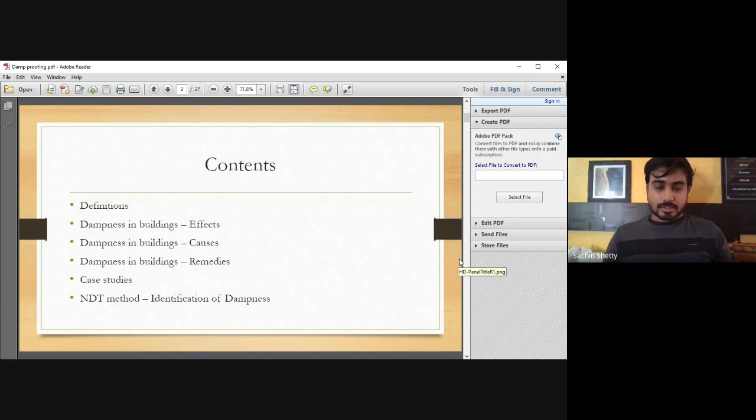I'm sure you guys would have heard of dampness in buildings and seen several such cases in nearby projects you've visited, or maybe at your own houses. Starting with the contents of this presentation, I'm going to cover effects, causes, and remedies for such dampness in buildings, whether residential or commercial. I've also included some case studies from my capacity as a manager at Embassy Group, where I had to analyze and assess such dampness in buildings while approving budgets for such projects. I need in-depth knowledge about it before giving approval for crores of budget in such projects. I've also included a new NDT method used for identification of dampness.

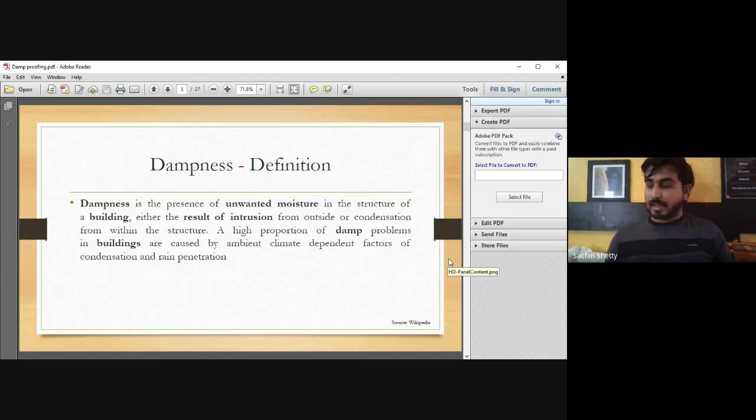So what is dampness? It's unwanted moisture present in the structure. It could result from seepage into the building through capillary action into the substructure, or it could be something on the superstructure due to leakages in sunken areas or through plumbing lines. It all depends on climatic factors in terms of external dampness, and also rainfall concentration or the catchment area in which the project is located.

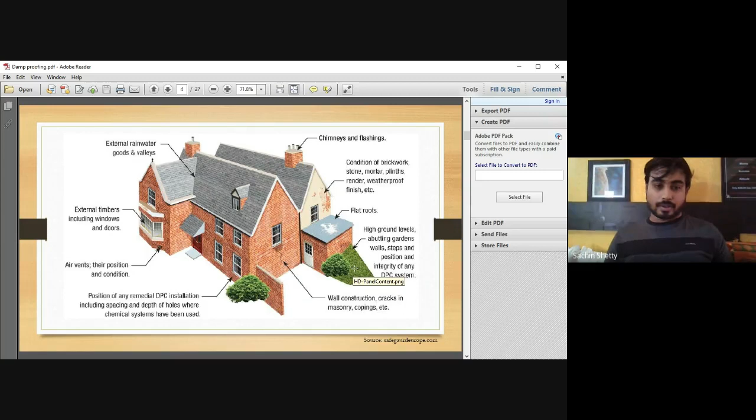I'll show you more pictures in upcoming slides. I think you guys would have seen these kinds of dampness in several buildings.

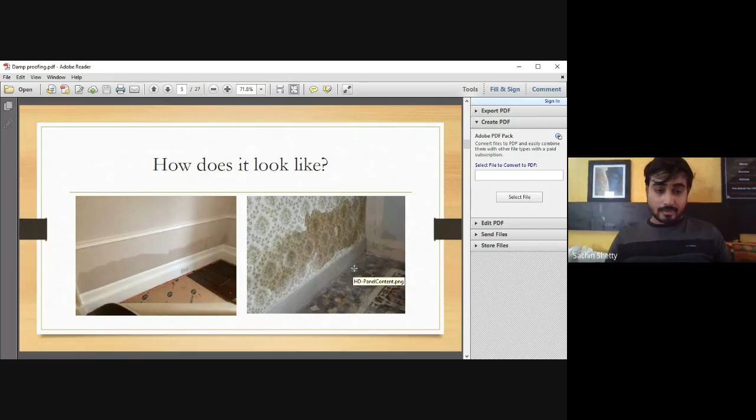If the DPC, the damp proof course, is not given sufficiently at the plinth level, so what are the effects of dampness in buildings?

It causes rotting of wood, especially in timber structures, and corrosion of metallic fixtures, which could also be corrosion of reinforcement in case of rising dampness. It deteriorates electric installations, which can cause electrocution, and also lead to occupational hazard, especially in office spaces.

This is a big challenge which we face, and then it deteriorates carpets and furnitures.

I will show you pictures how it can affect office spaces in terms of dampness, causing spots on floors and walls, damaging carpets, and petting off and removal of plaster, blistering of paints, and also causing efflorescence.

During the construction stage also you could see efflorescence very easily in case of such dampness causes, and it is dangerous for the health of occupants and the life of the structure.

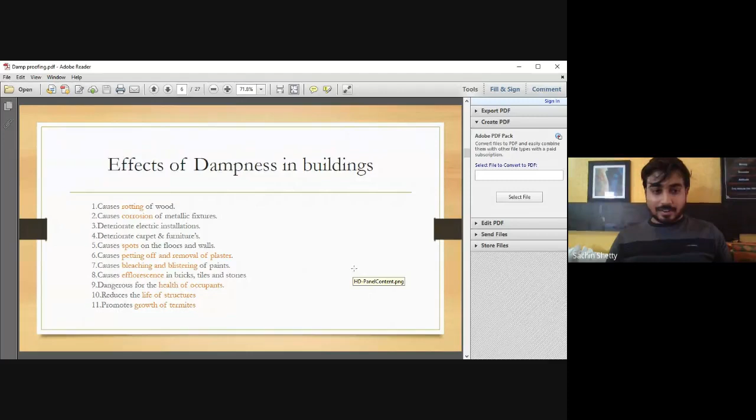Structural health monitoring is something which interests me a lot. So then it also promotes growth of termites.

So, dampness at ceiling levels, as you can see here, this could possibly be due to the stagnation of water above the ceiling level on the roof terrace.

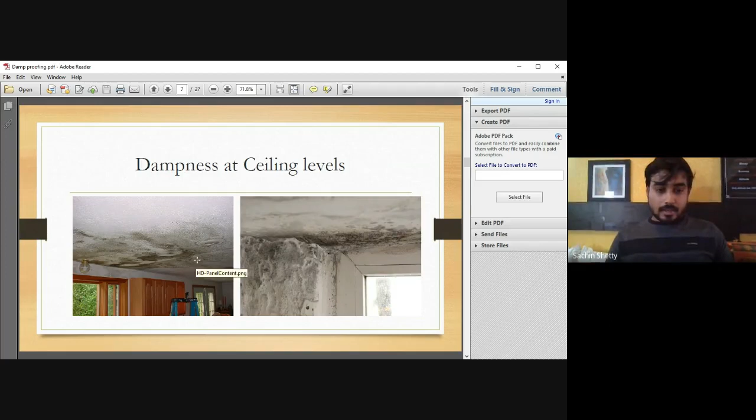It also causes a very bad aesthetic appearance, and it is harmful for occupants' health. It has been proved that it can cause asthma and such health diseases.

You guys would have seen such popping and blistering of paints, and then peeling and spalling out from the wall, which is again due to rising dampness.

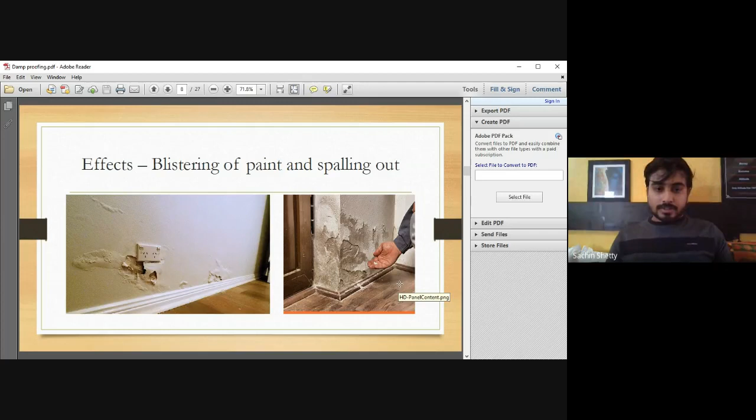So when I say rising dampness, what do I mean? If you could see here, due to the seepage above, due to the water table especially, there are two factors which I have seen as of today.

One is the capillary action from below the ground level. If the water table is too high, rising of water due to capillary action can cause dampness in the structure. Two would be due to the landscaping water.

Landscaping water can also seep through the permeable membrane of the building, or the bricks, if they are permeable. Then definitely it goes into the structure and causes dampness in such a way.

So this would be due to the hydrostatic pressure and so on. I think your geotechnical professor should be able to brief about it more.

If you introduce a DPC here, it stops that rising dampness right there, and does not allow it to enter into the structure. It avoids such dampness causes into the interior, or also the exterior part of the building, which also leads to efflorescence.

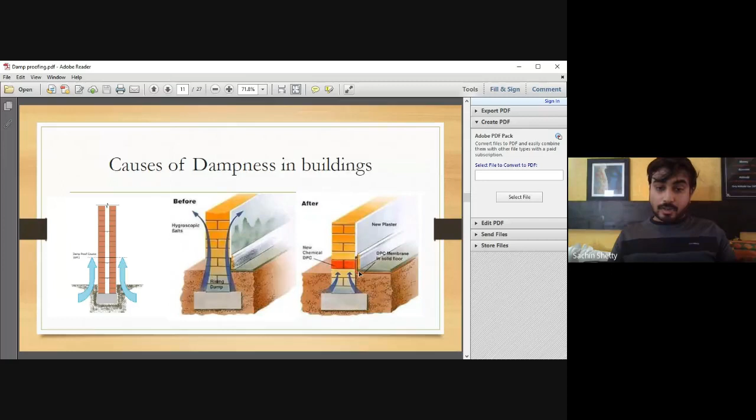Going back, what do you mean by efflorescence? It is a crystalline or powdery deposit of salts.

This happens when water rises through capillary action, or also could be if the water which you use for curing has mineral contents in it, which has soluble salts that remain as deposits on the surface, or on the masonry structure.

There you can feel, if you pinch it between two fingers, you can feel that powdery stuff. There are two things which you can see.

It could be mold, or it could be efflorescence. How do you identify? If you just pinch between two fingers, you will see the powdery layer falling down. That is efflorescence.

How do you get rid of this? You can pressurize water onto the wall, or also use something like muriatic acid, and then use baking soda or such a neutralizing compound, so that the brick does not get discolored.

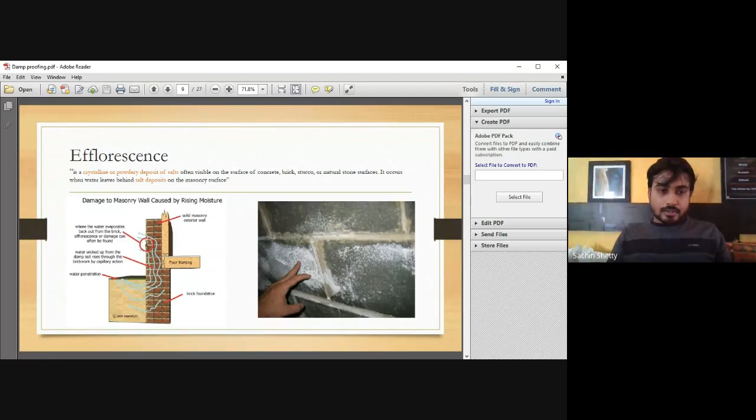Here you can see the landscaping water which is used is getting infiltrated and ingressed into the building structure, ultimately causing efflorescence to the exterior part of the building.

Then what are the causes of dampness in buildings? Rainwater penetration, as I said, then the level of site, the topography matters, and the permeability of soil, the soil contents, the mineral contents in the soil and the water which it has. That matters a lot, which can cause dampness.

Then climatic condition due to heavy freeze and thaw cycles, especially in cold countries, they face a lot of freeze and thaw cycles. So then defective orientation of the building, moisture entrapped during construction, and defective construction joints, which is something we face locally in our regions more, due to defective construction joints.

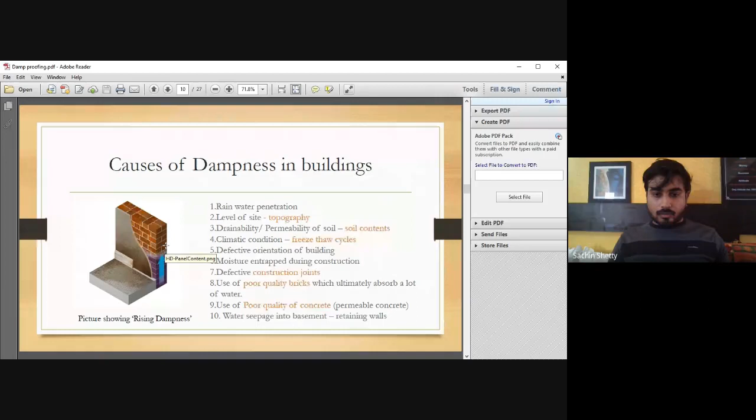That's why it is very important to ensure that the DPC or the DPM is put up in the structure during the construction stage itself. So then use of poor quality bricks, poor quality concrete, and water seepage into the basement retaining walls.

I've explained this. So here you can see, even though the damp-proof course is introduced at the plinth level, this DPC at the interior part has failed to withhold the ingressing water, and it has ultimately ingressed and is damaging the interior structure. So how do you get rid of it?

There are different types to avoid them and remedy such stuff. So here one such example is that they have done grouting. I will explain more to you guys what is grouting in the next slides.

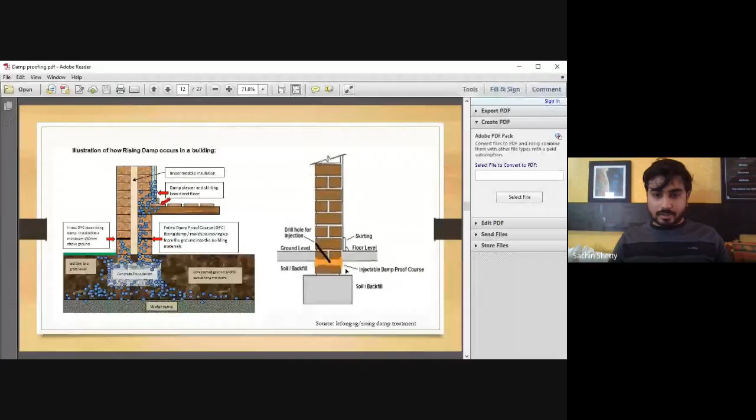So what are the remedies for application of DPC? This picture I have taken from your IS codes. You can see that in a simple way they have explained how important it is that you introduce a DPC within 150 mm to 200 mm of the plinth level. And here at the floor topping, you have the DPC introduced.

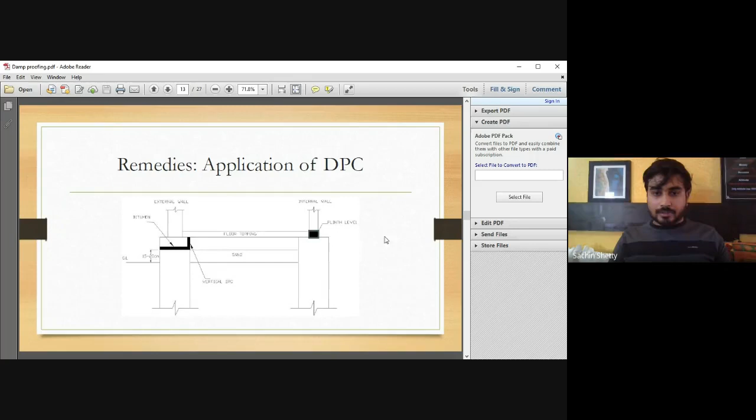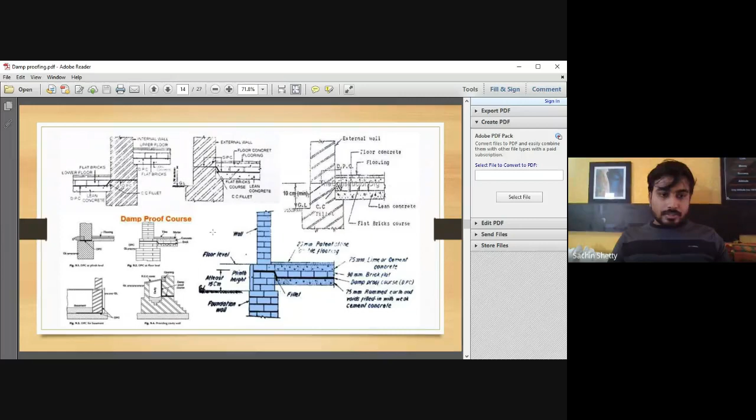Also, more pictures from the IS book only. You can see that the damp proof course is introduced. Usually what happens is that they recommend having the DPC at least at a 135 degree angle when it is joining between the two joints, so you need to ensure that you have maintained at least 135 degrees of slope, and at the gap you will have a fillet which can again avoid ingressing water. So these are few examples, let me put it on full screen for more clarity.

So I think in these days, what they usually do is use flashing sheets. Here they have used one flashing sheet, which seems to be made of aluminium. There are different types of flashing sheets which they use, like sheets made of copper and lead coated.

So this is the sheet which is going into the wall, and this is called counter flashing. And here is the termination strip which they have used, so that even if water is entering, it stops here and does not get into the building.

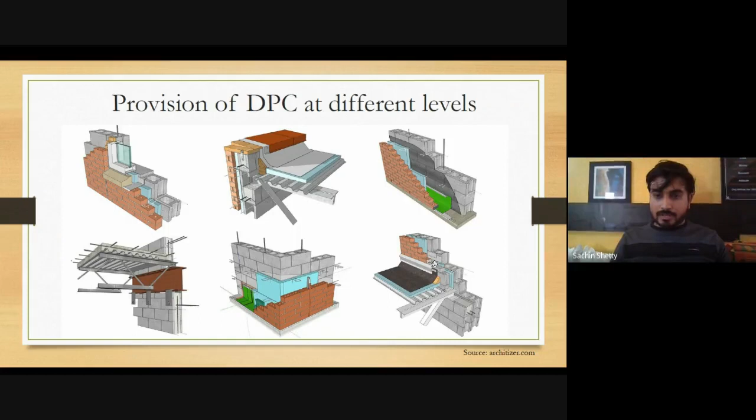Several such examples here also show that they have used filler material, the termination strip, and the counter flashing. So there are several ways. For chimneys here they have used flashing, and again there is one such example.

After the counter flashing, in roof structures they usually have shingles or such complementary materials. What they ensure is that they are overlapping at least 200 to 250 onto the shingles, so that water does not ingress into the building.

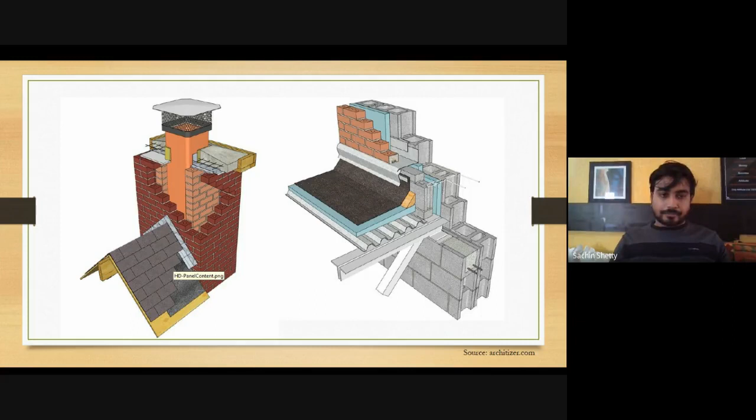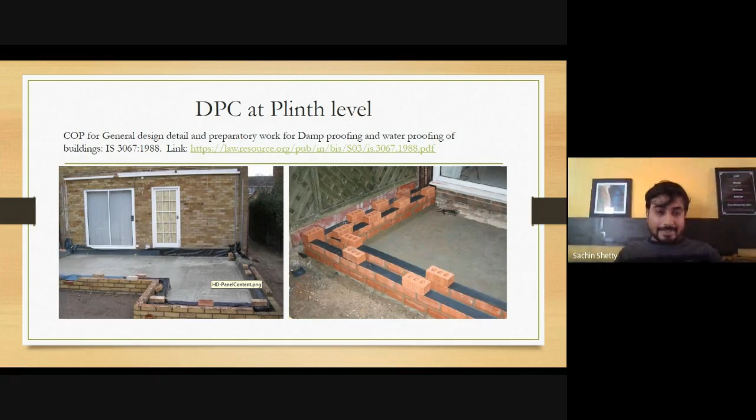So here you can see at the plinth level, even in high rainy areas, they ensure that they use DPCs, and this is another example.

You should also see to it that you are not using too much of this membrane. Especially in timber structures, if you fill in this material a lot and put sheets everywhere, it becomes too airtight, and also wood can sweat. So when it starts sweating, within the structure it can create dampness, even if you have maintained enough dampness coverage due to the external weather.

So you should ensure that you are using best practices. You can refer to EU codes, BS standards, or IS standards. There are several codes. So this is one real case scenario which I've just put up to show you guys.

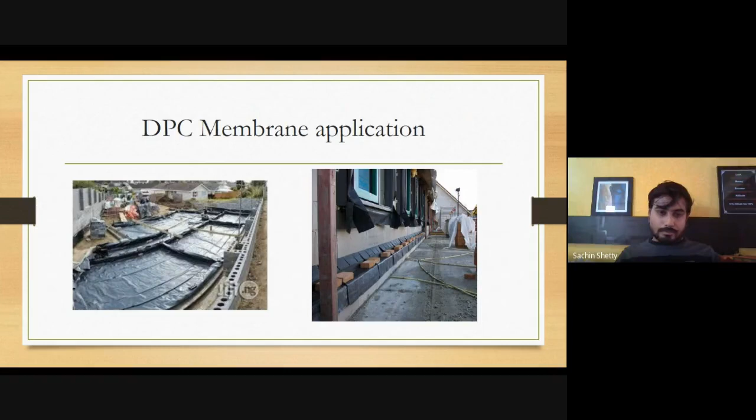So what happens is that when I say integral waterproofing, it becomes part of the concrete, it becomes part of the structure. So they have shown you guys something which is used above the concrete level, and if you want to make it a part of the structure itself, you go for integral waterproofing methods. This is one such, and these are more images.

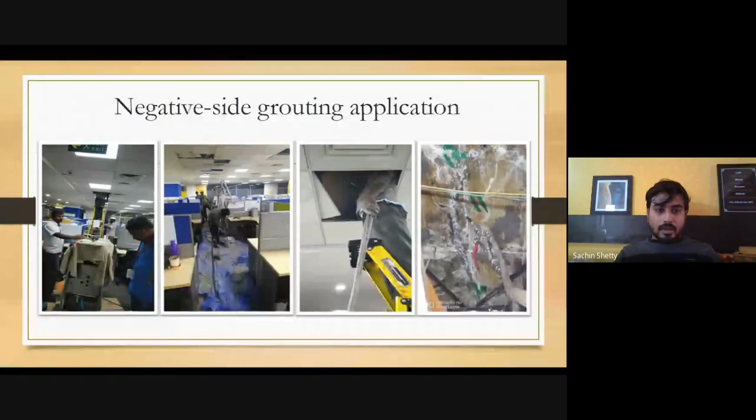So here is another example wherein due to water seepage issues, due to the high water table, we have seen that water seeps into the building, and several times they have done negative grouting here. There are challenges which we face sometimes, in this case in one of the projects which I'm handling. The water table is too high, and the topography is such that due to the rock strata, they were unable to introduce the sheet pilings or any type of piles at some stages. Due to which we have been facing water seepage issues like this.

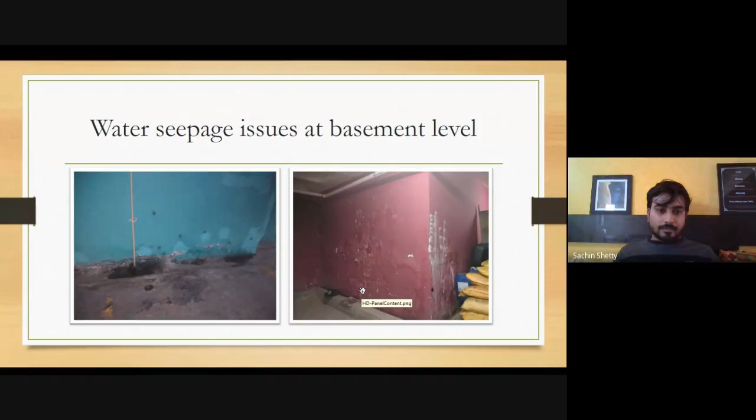So we need to always put a remedy to it. We need to maintain the structure. We cannot permanently avoid the water seepage. So we create gutters and ensure that through the gutters, water is going into the sump, and then we dewater it. There are several dewatering systems, well pointing systems, which already exist in this particular project. So now again, we are doing another remedy to it. This is another example.

One such example which I have put up here for simple understanding of integral waterproofing: you can see that they do coving at a certain workmanship level. They do a V or U-shaped groove, and then they fill in the water stop grouts. What happens in such grouts is that they become part of the concrete. The minerals which such grouts carry form needle-like crystalline materials, and then they react with the unhydrated concrete and become part of the concrete. Whenever water, even during the lifespan of the concrete, gets in touch with this material, it creates more crystalline material, clogs all those pores, and blocks the voids. So this is another method which is in practice in the market.

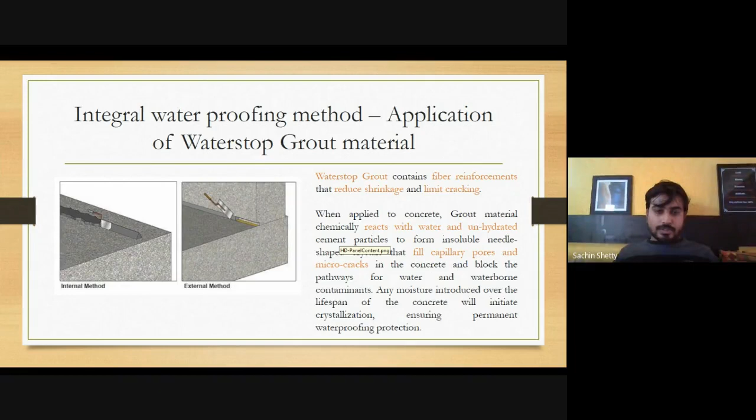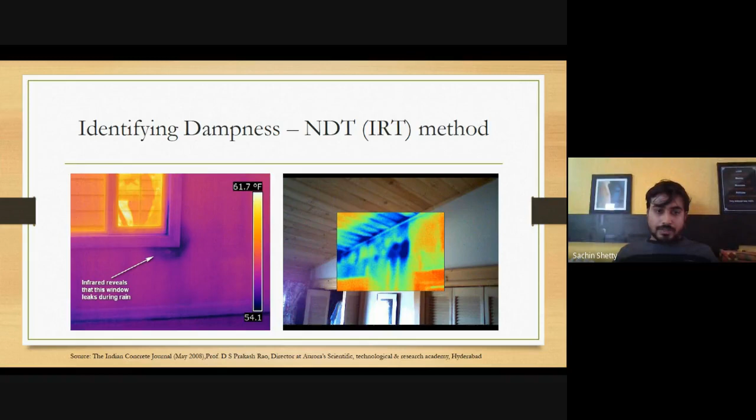So how do we identify dampness without damaging the structure, without touching the structure? One good non-destructive method is IR, the infrared thermographic method. Here you can see that the infrared reveals window leaks. Whichever is bright is at high or room temperature, and what you see in a dark color is exposed to a dampness issue. So you will have to apply the DPC course there, or there are surface finishes which they use. You can use any of such methods. IRT methods are also used for identifying blockages in pipes, etc. So that's it. Thank you.

Any questions you can ask me? Anything out of this PPT which you want to discuss, I'm okay to answer that also. Students, if you have any doubts or any clarification or any queries, please discuss with Sachin. Even in terms of your higher studies or whatever interests you, and you are not clear about it, you can ask me. If you have any doubts with respect to higher studies and how you can build your resumes, you can interact, students. Openly, you can interact. And with respect to placement also you can interact, definitely, because he is the first placement officer in the civil engineering department. He published some of the papers. You can interact in that manner.

Did I go too fast? Varsha, were you able to grasp it? Yeah, it was not fast. No, it was not that fast. Great. So I will wait for another 2 minutes. If you have any questions, you guys can ask me.